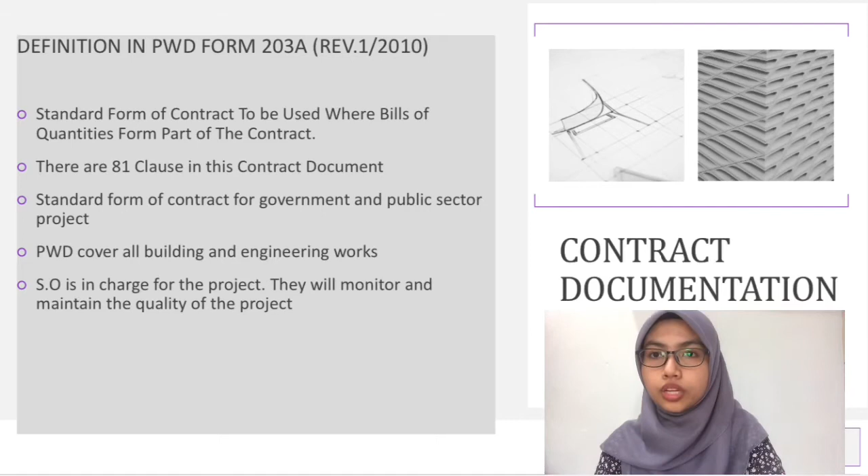The Superintending Officer (SO) is in charge of the project. They will monitor and maintain the quality of the project. Contract in this PWD means this contract and the appendix attached hereto. The documents forming the tender and acceptance include the form of tender, letter of acceptance of tender, contract drawings, bills of quantity, specification, and treasury instructions. All these documents shall be complementary to one another.

Next, interpretation in clause 1.2 states that the terms approval, and directed or direction, wherever used in this contract, shall be in written form. Under clause 6.0 scope of contract, the contractor shall, upon and subject to this contract, construct and complete the works. The contractor shall also undertake any consequential work in relation to the construction and completion of work on the site and make good any defect, imperfection, shrinkage, or any other fault. This can be found under clause 6.1 until clause 6.3.

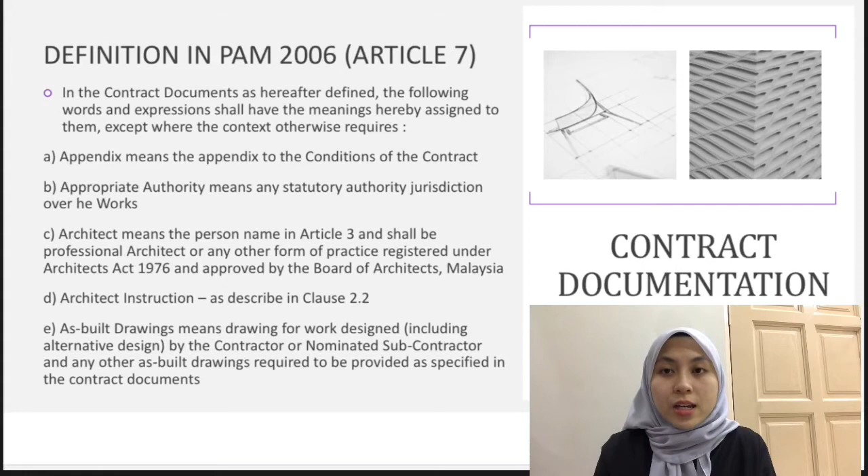As-built drawings means drawings for work design including alternative design by the contractor or nominated subcontractor, and any other as-built drawings required to be provided as specified in the contract document. Next, certificate of extension of time means the certificate issued under clause 23.4. Certificate of making good defects means the certificate issued under clause 15.6. Certificate of non-completion means the certificate issued under clause 22.1. Certificate of partial completion means the certificate issued under clause 16.1. Certificate of practical completion means the certificate issued under 15.2. Certificate of sectional completion means the certificate issued under 21.3.

Clauses means the clauses in the conditions of the contract. Completion date means the date for completion of the works stated in the appendix under clause 21.1 and 21.3 or the last extended date granted under clause 23.4. And lastly, conditions means conditions of the contract. So next, we move into the confirmation of architect's instruction as described in clause 2.2. Consultant means the engineer, quantity surveyor, and specialist consultant.

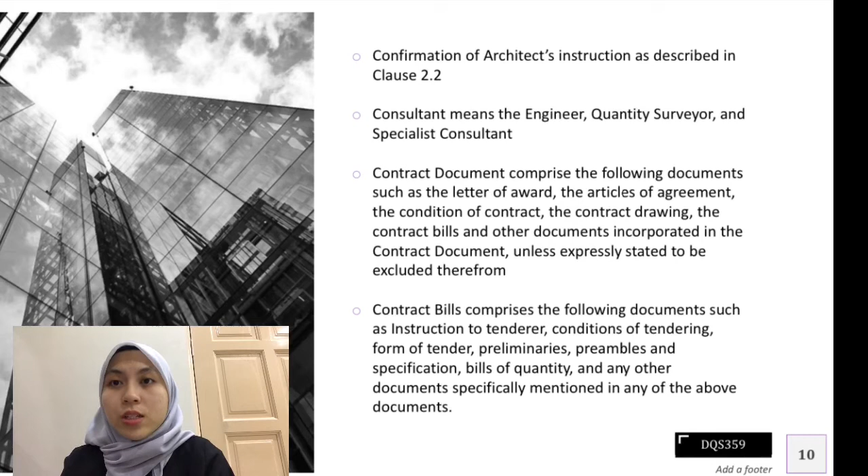Then contract documents comprise the following documents, such as the letter of award, the articles of agreement, the conditions of contract, the contract drawings, the contract bills, and other documents incorporated in the contract documents, unless expressly stated to be excluded therefrom. Contract bills comprise the following documents, such as instructions to tenderers, conditions of tendering, form of tender, preliminaries, preambles and specification, bills of quantity, and any other documents specifically mentioned in any of the above documents.

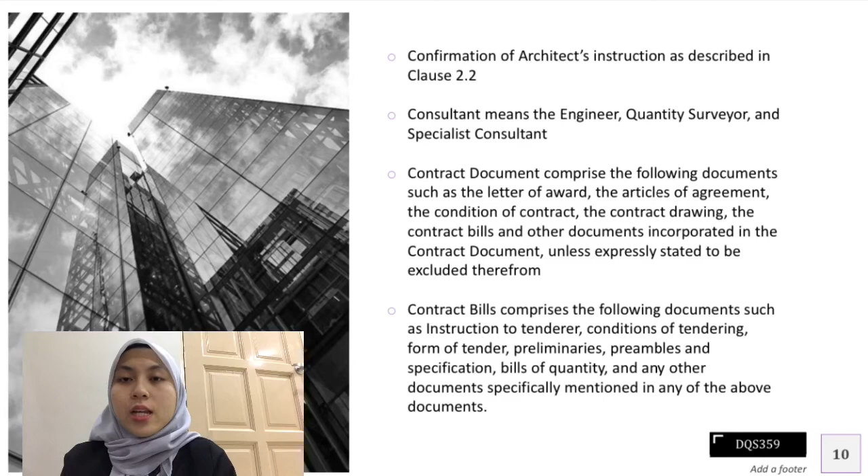So today, I'm very sure that everyone already knows about these two types of contract, which are PWD, Public Works Department, and PAM, Pertubuhan Arkitek Malaysia, that are commonly used in Malaysia. These two types of contract have a lot of differences, so I'm going to share with you the differences between PWD and PAM types of contract.

So first, the PWD standard form of contract is commonly used for government and public sector projects, for example, public schools and government hospitals. While the PAM standard form of contract is commonly used for private sector projects, for example, shopping malls and hotels. Next, the PWD type of contract covers all building and engineering works, including dams, roads and bridges. Next, PAM only covers building works.

Thirdly, the contractor is the person responsible to buy the insurance in PWD types of contract, while in PAM, mentioned in clause 20A, 20B and 20C, there is a built-in choice where either the client or the contractor can buy the insurance for the project.

Next, the Superintending Officer is in charge of the project. They will monitor and maintain the quality of the project. In PWD types of contract, while in PAM types of contract, the architect is in charge as the SO, Superintending Officer, for the project to maintain its quality.

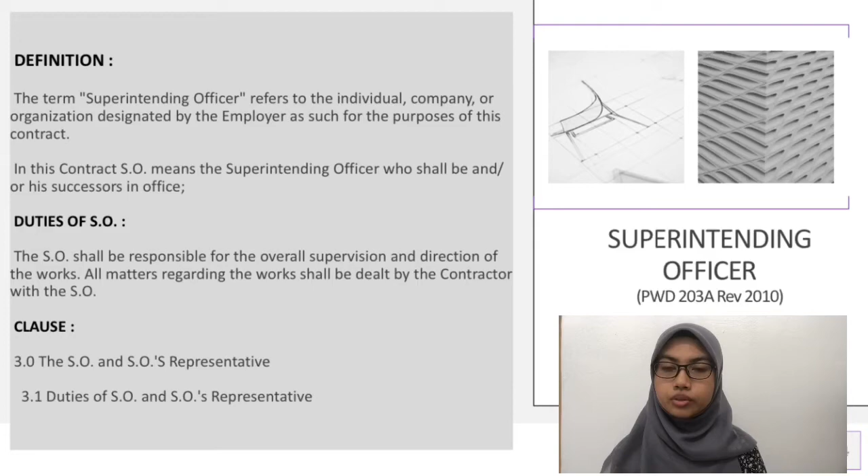Next, duties of SO. The SO should be responsible for the overall supervision and direction of the works. All matters regarding the work should be dealt with by the contractor through the SO. Clause 3.0 explains about the SO and SO representative, while 3.1 covers duties of the SO and SO representative. Management and direction of the works will be the responsibility of the Superintending Officer. The contractor should deal with all matters concerning the works in conjunction with the Superintending Officer.

Basically, the SO has two responsibilities under the contract and at common law. First, as an agent for the employer, and second, as a certifier. The Superintending Officer's responsibility as a certifier includes certifying payments, evaluating the contractor's application for an extension of time, EOT, certifying variation orders, VO, and determining claims for loss and expense.

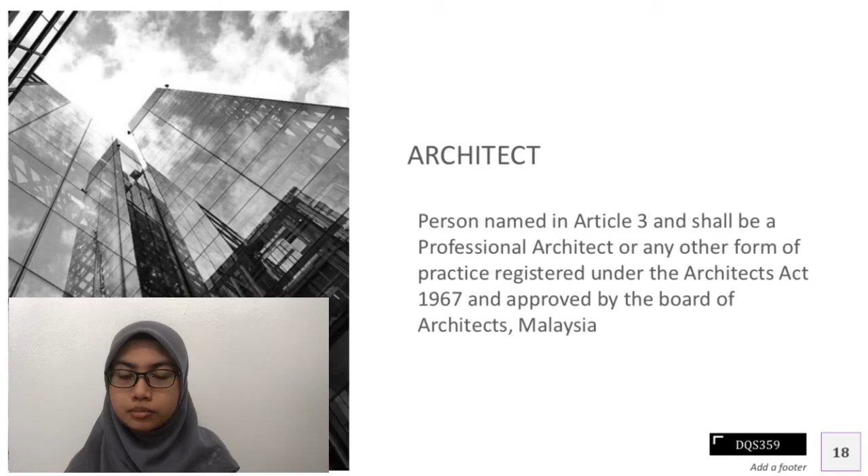Architect means the person named in Article 3 and should be a professional architect or any other form of practice registered under the Architects Act 1967 and approved by the Board of Architects Malaysia.

Article 3: the term the architect in the contract shall mean, or in the event of such person ceasing to be the architect for the purpose of the contract, such other person as the employer shall appoint within 28 days therefrom.

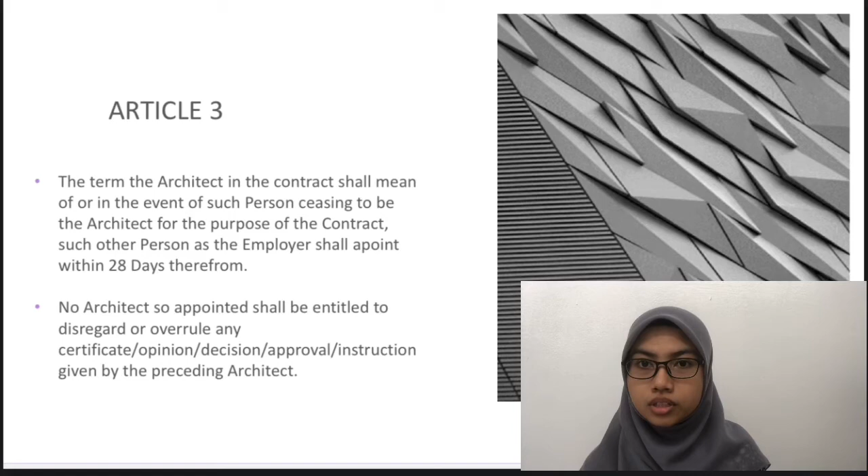Next, I'll be talking about Superintending Officer Representative, SOR, or in Malay we call it Pegawai Penguasa. SOR is the person appointed from time to time by the Superintending Officer, SO. The Superintending Officer's Representative, SOR, shall be responsible to the Superintending Officer, SO, and shall carry out such duties and exercise such authorities as may be delegated to him by the Superintending Officer, SO.

SOR's scope of work is related to technical matters on-site. For example, problems regarding level, dimension, and misinformation will be referred to the SOR. But if the SOR cannot make a decision, it will be referred to the SO, Superintending Officer.

Next, I'll be talking about Superintending Officer Representative, SOR, in PWD Form 203A, Revision 1 2010 type of contract. In the JKR 203A standard form of contract, mentioned in clause 3.1, duties of the Superintending Officer, SO, and SO Representative, it is stated that the SO is responsible for the overall supervision and direction of the work on site.

The duties and responsibilities are complemented with a certain extent of power and authority. What this means is that under the JKR 203A contract, the SO is allotted wide power and authority to ensure that the project is completed according to the date.

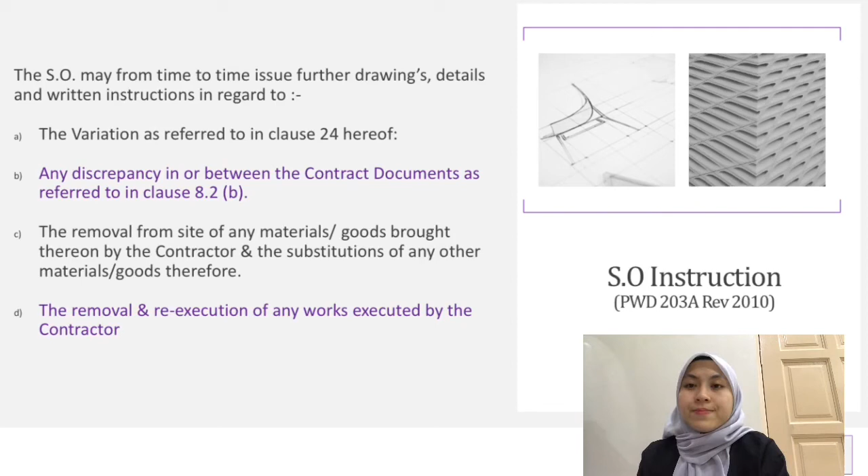The removal & re-execution of any works executed by the contractor, the dismissal from works of any person mentioned in clause 23.6 hereof employed thereupon, the opening up for inspection of any work covered up, the amending and making good of any defects whatsoever under clause 48, and any matter in respect of which the SO is expressly empowered by this contract to issue instructions.

Appendix number 5.2 in PWD, SO instructions continued: all instructions by the SO must be in writing. The contractor must comply with all instructions given by the SO. And third, if the SO gives instruction orally, then the SO needs to issue a written instruction within 7 days.

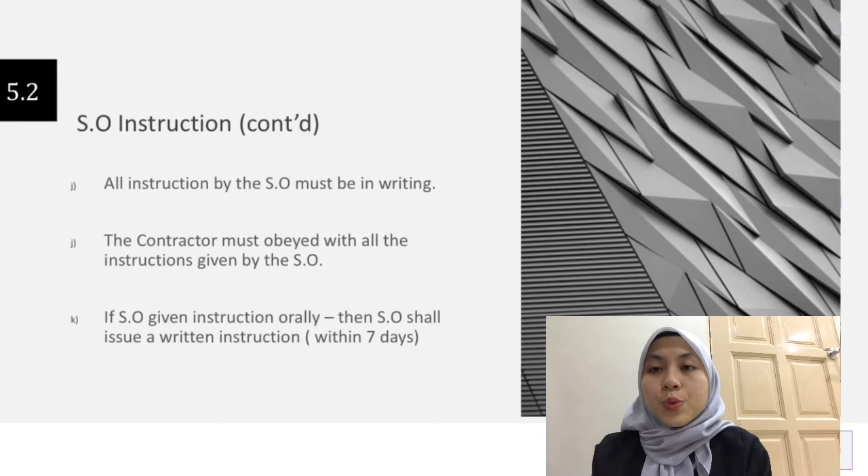If within 7 days after receipt of the written instruction from the SO the contractor does not comply, the SO can take any other rights or remedies available to the government under this contract. First, pay another contractor or other person to execute any work whatsoever. Second, the contractor will take responsibility for all the expenses including on-cost charges. Third, the government shall be entitled to deduct such cost etc. under this contract or recover it from the performance bond as a debt from the contractor.

Instruction AI, PAM 2006 clause 2.1: contractor to comply with Architect's Instruction (AI). The contractor shall, subject to clause 2.2 and 2.3, comply with all instructions issued to him by the architect in regard to any matter in respect of which the architect is expressly empowered by these conditions to issue instructions.

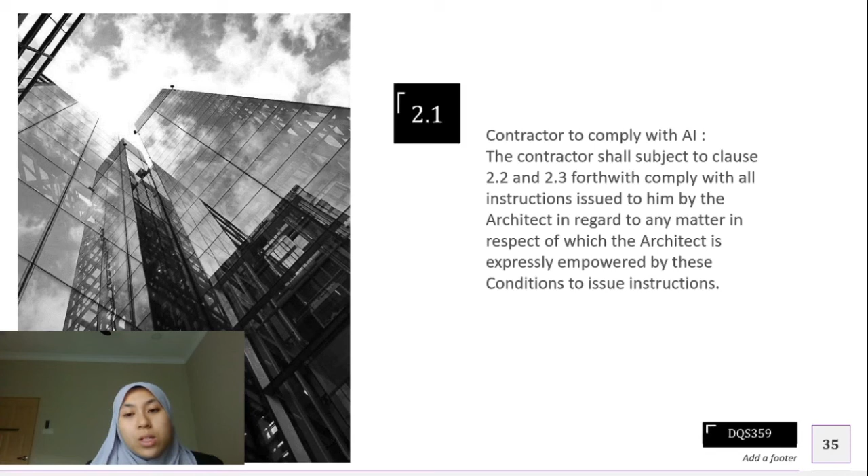Next, clause 2.2: all instructions issued by the architect shall be in writing, expressly entitled Architect's Instruction (AI). This means all issues from the contractor must be in writing, and all issued by the architect must be in writing, expressly entitled - meaning Architect Instruction AI must be the title on the issue. All other forms of written instruction, including drawings issued by the architect, shall be an AI.

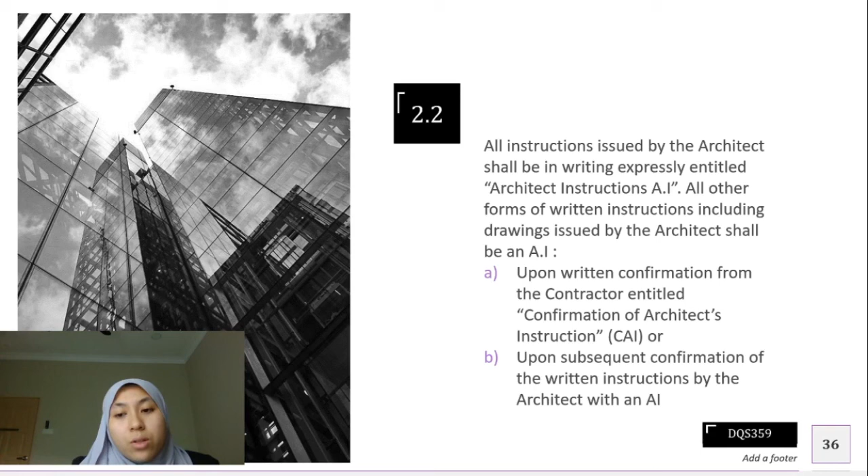Upon written confirmation from the contractor, entitled Confirmation of the Architect's Instructions CAI - when the architect confirms the form, then the form will be named Confirmation of Architect's Instructions CAI - or upon subsequent confirmation of the written instruction by the architect, it is an AI.

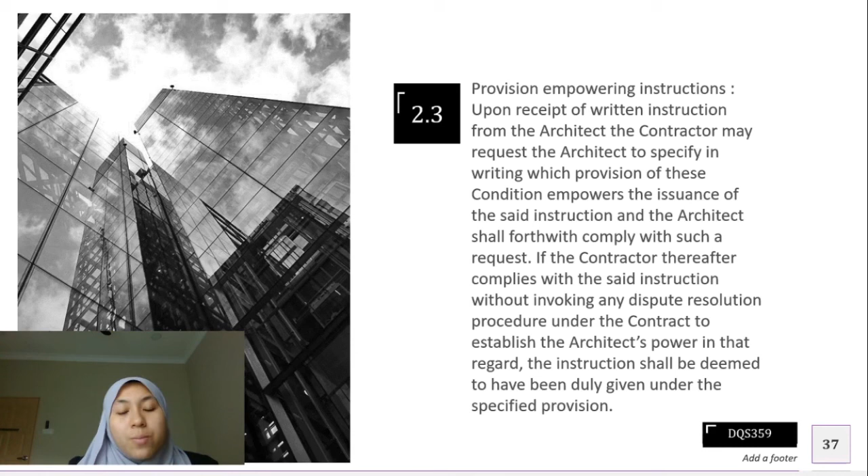Next, clause 2.3, provision empowering instructions: upon receipt of written instruction from the architect, the contractor may request the architect to specify in writing which provision of this condition empowers the issuance of the said instruction, and the architect shall forthwith comply with such request. If the contractor complies with the said instruction without invoking any dispute resolution procedure under the contract to establish the architect's power in that regard, the instruction shall be deemed to have been duly given under the specified provision.

Clause 2.4, failure of contractor to comply with an AI: if the contractor fails to follow the architect's instruction within the term of compliance, which shall be not less than 7 days from receipt of the architect's instruction as stated by the architect in the AI, and the contractor does not comply, the employer may, without prejudice to any other rights and remedies which he may possess under the contract, employ and pay another person to execute any work which may be necessary to give effect to such instruction.

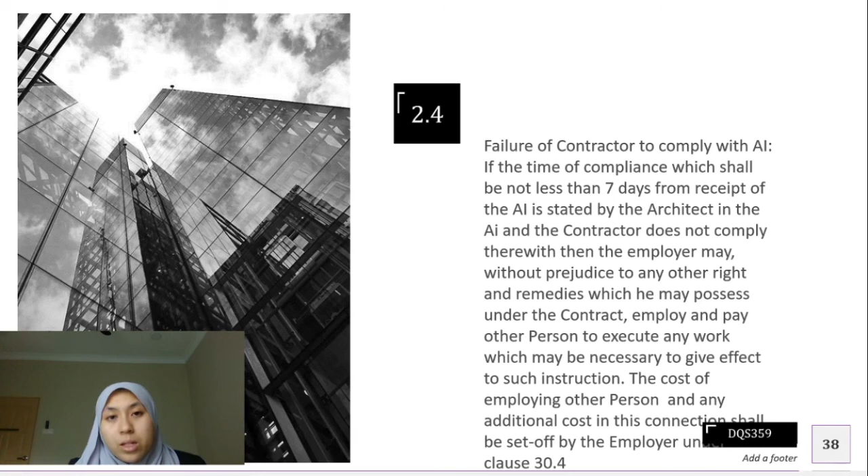The cost of employing the other person and any additional cost in this connection shall be set off by the employer, under clause 30.4.